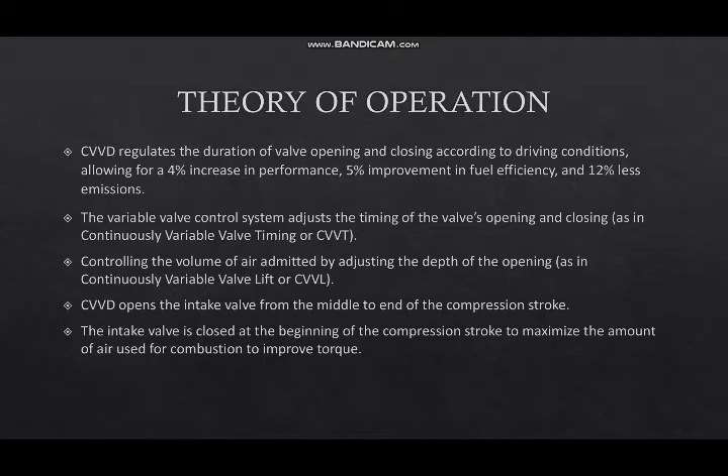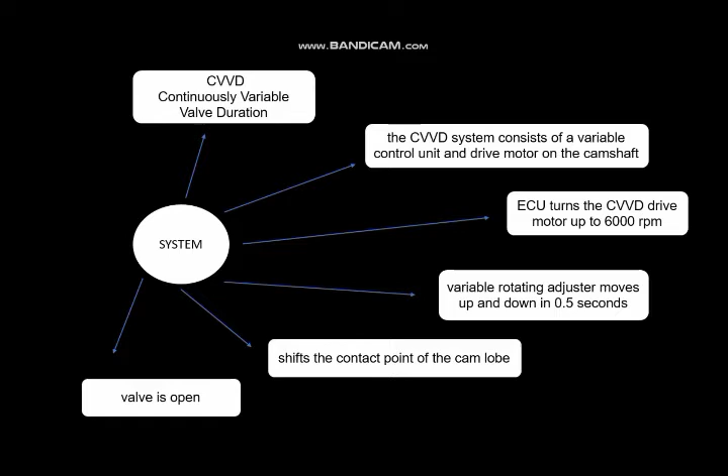Number 5. Shift the contact point of the cam lobe. Cam lobe, we talk about camshaft. Camshaft and cam lobe are not directly attached. And lastly, number 6. Valve is open. The system determines how long a valve is open. And we go to another slide.

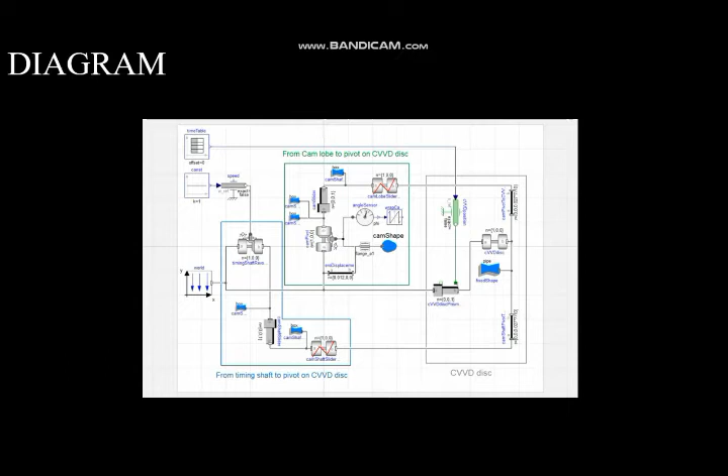Alright, this slide shows a diagram of CVVD. We can see it's a circuit from cam lobe to pivot on CVVD disk, and also from timing shaft to pivot on CVVD disk. You can see there is an angle sensor and cam shaft, and also a timetable. Now we go through another slide.

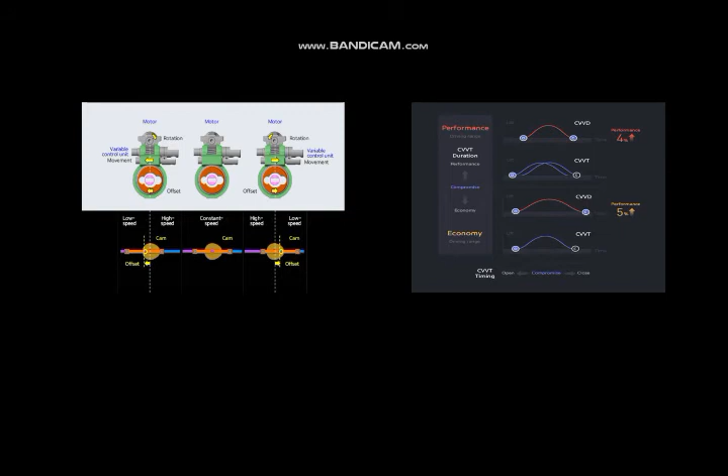Alright, we go to another slide. You can see that this slide has two pictures, and this picture shows the actual part and a simplified animation that slides the wheel to the left or right, and the linkage center point changer altering the valve duration. And we can go to the last part of this session.

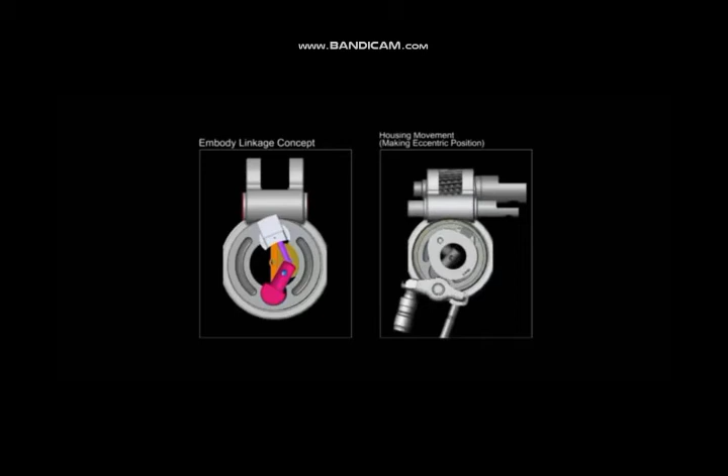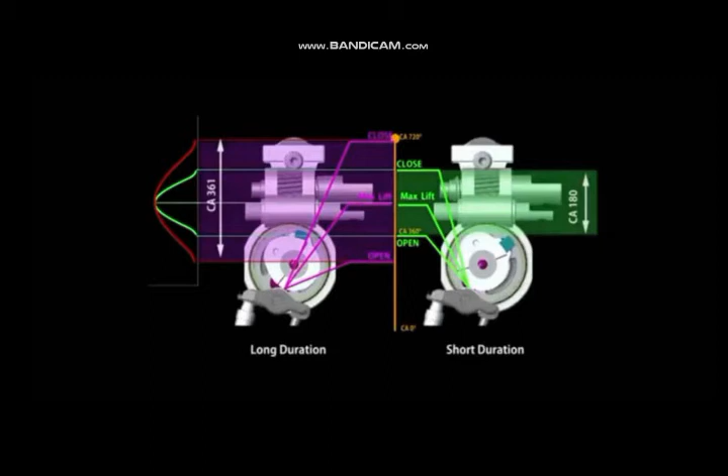Alright, this last slide of this session shows two types of duration. First, long duration and short duration. And I want to talk about it. The beauty of this system is flexibility, and it allows you to optimize any RPM, improving horsepower across a wide range.

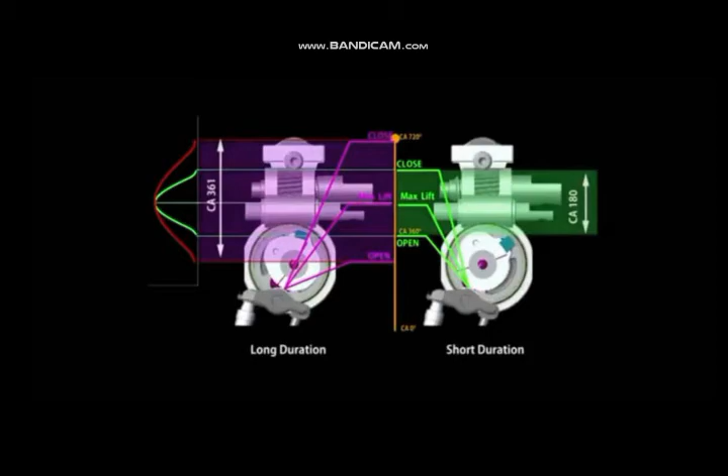It's the advantages and disadvantages of the system CVVD. Okay, let's go to the advantages. Hyundai claims it has created the world's first continuously variable valve duration, CVVD, engine technology, which it says increases engine performance by 4% and efficiency by 5%. Next, CVVD is economy, fun to drive and green.

Fun to drive means comfortable while driving the car. And green means less pollution and green for the ecosystem. Besides that, the technology is achieved with a relatively simple mechanical construction to achieve reliability while minimizing cost increase. Truly an innovation.

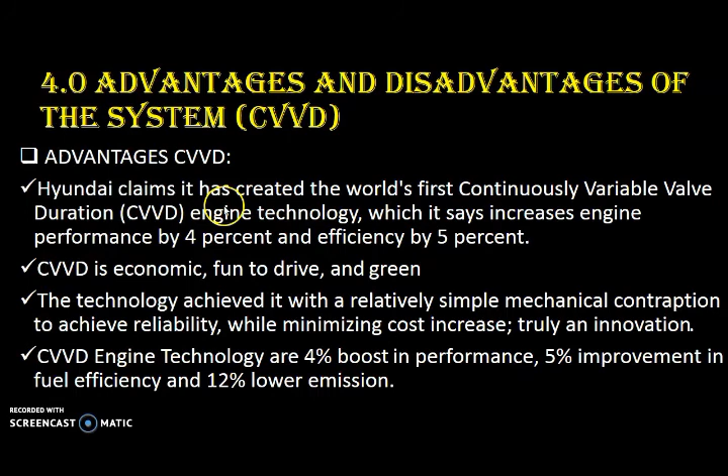Next, CVVD engine technology gives a 4% boost in performance, 5% improvement in fuel efficiency, and 12% lower emissions. Okay, right? Next, Hyundai Motor Group successfully created the most simply structured, mechanically implemented CVVD mechanism through countless iterations. Okay.

Next, continuously variable valve duration, CVVD, stretches or shortens the time the intake valves are open depending on engine speed and load. Next, engine building is an exercise in balancing efficiency with more power, because much of the compromise involves the camshaft, which controls the air that flows in and out of the engine cylinders. These pictures show the CVVD engine technology.

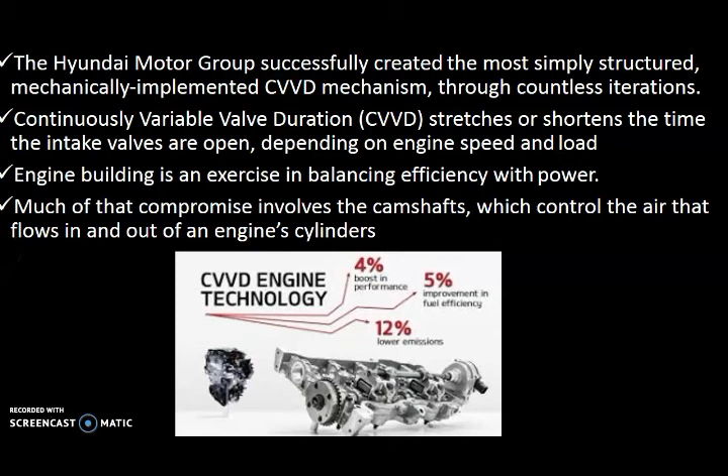Okay, next, the disadvantages of CVVD. The first point is the problem that valve timing that works for high RPM performance running might not work very well for idling or low RPM cruising. It means the valve timing for performance running does not work very well at idling or lower RPM cruising.

Next, here's a more detailed explanation, but the general idea uses a form of rotational black magic in cam phasing to advance or delay the valve timing. Variable valve lift gets even more complicated. CVVD is not necessarily less complicated than variable timing or lift, but CVVD is an elegant solution because existing variable valve technology had to compromise between performance and economy. It means these valve technologies could not achieve both and had to seek a middle ground between the two.

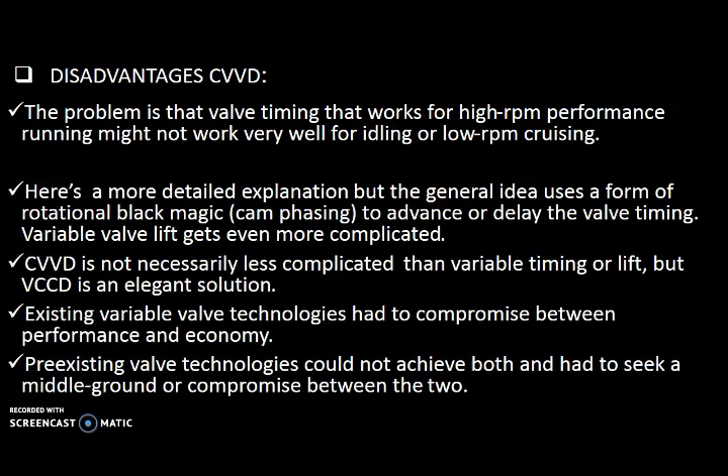Today I would like to tell you about my opinion on the technology for the near future. For me, I believe this will be a great technology from Hyundai, creating the world's first CVVD, continuously variable valve duration technology, because it improves engine performance and economy by up to 4% and 5% respectively. The benefit is that you can have a long valve duration during low engine speed and loads, allowing plenty of time for the air to enter the cylinder.

If we compare to the last technology Hyundai produced, the performance of the new technology is way better than before. Besides that, this technology is a great eco-friendly technology, which means it has no adverse effect on the environment and uses a sustainable source of energy. For me, this technology will be just fine for long-term usage in this era and for the future ahead.